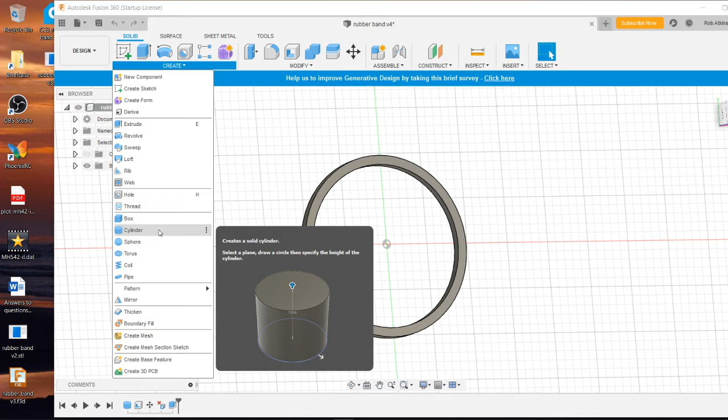Okay, guys, Fusion 360 then. It's fairly straightforward to create rubber bands. Essentially, you start with a sketch, and then you start by creating a cylinder. And from the cylinder, you can set the height after you've done the cylinder.

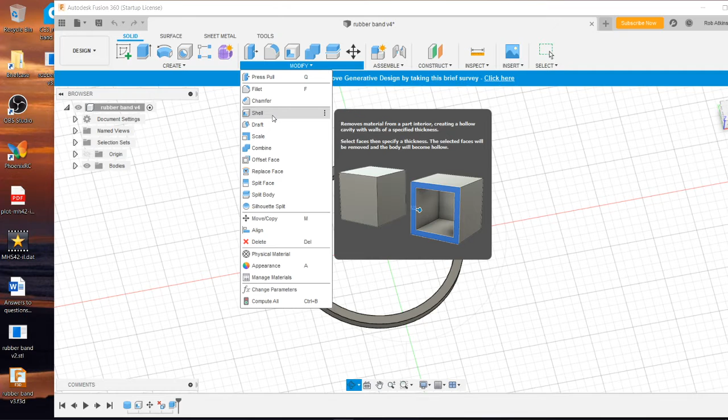Free orbit down the bottom here. You can rock this around so you can then look at the thickness of it. So you create yourself a cylinder. After you've created the cylinder, you go and modify it to turn it into a shell. And then once you've modified it into a shell, you can delete the middle section that sits in here. Otherwise, you'll end up with a sort of bottom in here.

And you can see that here, look. So cylinder, you end up with that flat bit at the bottom. You delete it out. You set your thickness. I've set my thickness, I think it's 20 millimeters across and 0.5 millimeters, but you can experiment with whatever thickness suits you best. I'm finding that providing your printer is printing out TPU okay, it will print pretty good at about 0.5 millimeter.

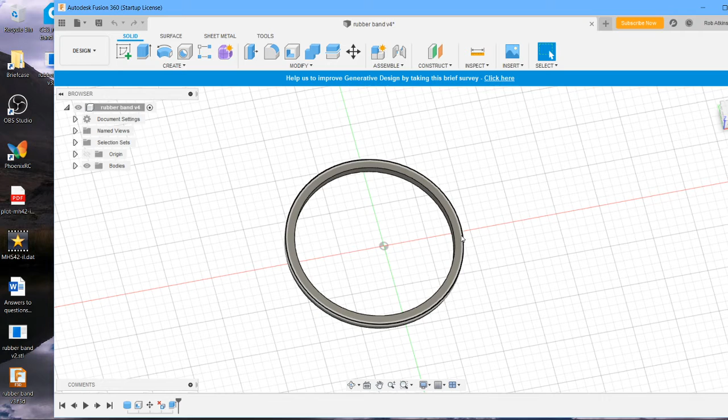When you print it, it doesn't look like it's strong enough, but as soon as you let it cool down and you stretch it over the Sycamore and lock it into the two slots, it holds either the 2025 or 2032 3-volt battery in there really nicely. Difference between 2025 is 2.5 millimeters and the 2032 is 3 or 3.2 millimeters, the battery is a bit thicker, and it works with any LED.

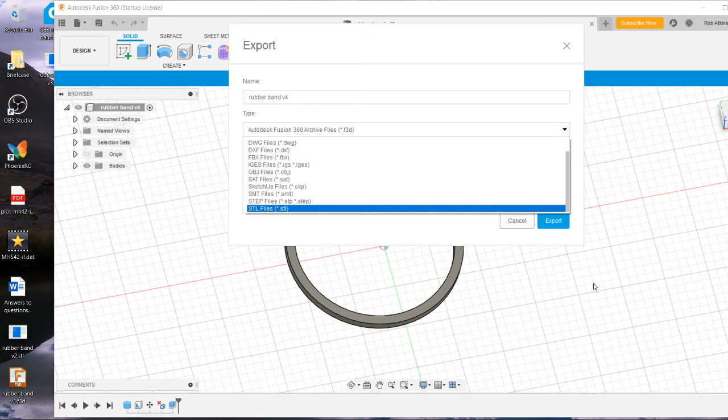Once you've done that, then you would go into Fusion 360 and save it as a project or whatever, and then you export it. Choose export, and then choose to export it as an STL file, and then it will go online to complete that task and compute it, and then pull it back as an STL file, and typically it's going to save it to your desktop. Once you have done that, so I'll drag in V3, all right.

Once you've done that, I would recommend setting your head temperature to 205, although you can experiment depending on what version of TPU you've got. Your build plate temperature can be anywhere between 50 and 60, your flow rate 102, your print speed, keep it slow basically, 45 to 50 millimeters per second. Doesn't need any build plate rafts or brims because it's fairly thick anyway, and if your build plate's good enough, you shouldn't need a brim on here.

And with TPU, as you know, it's very rubbery, and this does stick quite well on a build plate, unlike PLA, which typically requires a brim, depending on thicknesses, etc. Set your experimental settings, this is in Cura, to slicing tolerance middle. Nothing else apart from top and bottom layer of 2 and a wall thickness of 1. I think that's the key things.

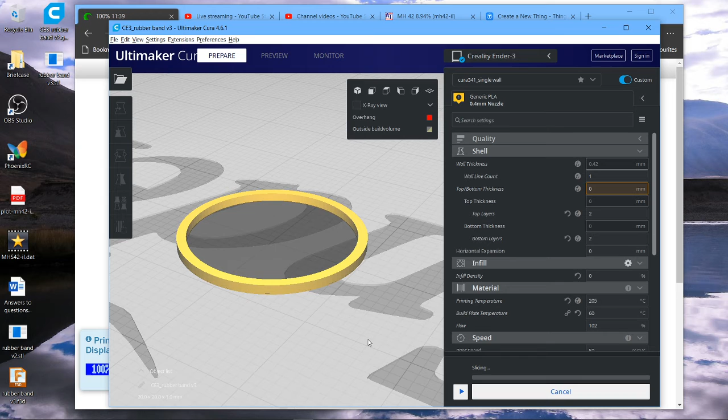And then slice it up and preview it, and let's just play this, see how it plays out. And I like this feature, I like the play feature, because you actually get to see what the printer will do. Yeah, which is what you want to see. I like to say what you see is what you get, and pretty much this is running, everything's dialed in on your temperatures and your feeds.

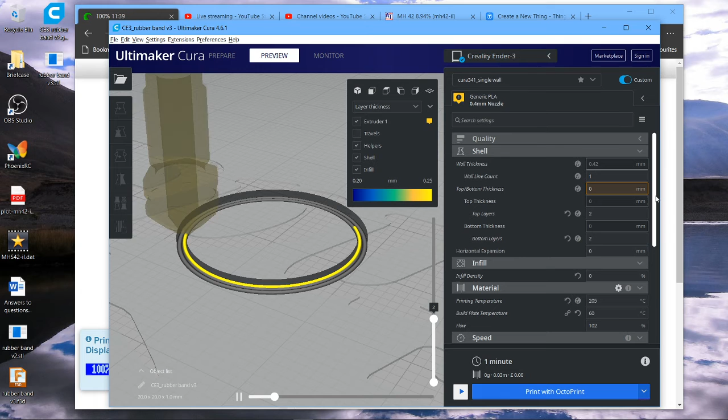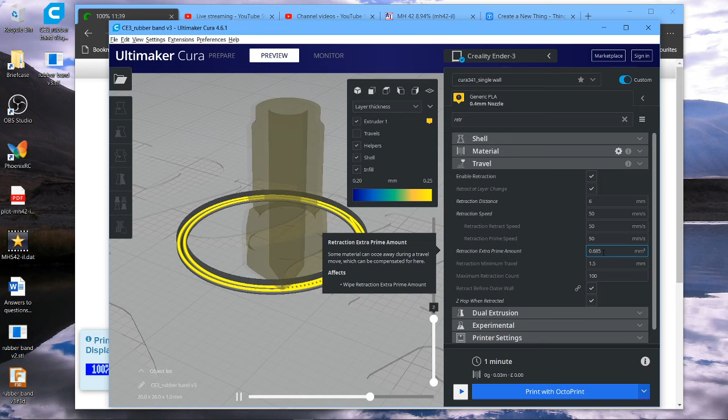Don't forget, if you're using an Ender or Anycubic or any of those other printers, you will need to set your retract settings to get good quality prints. I've found my retract settings seem to be optimal at about 6 millimeter on the retract distance, 0.685 for the extra prime, which is the amount of material you pump back into the head after you've retracted.

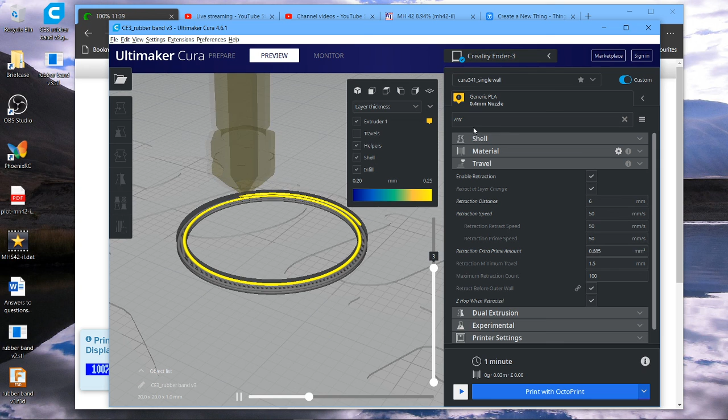And I think these are defaults, 50 millimeters per second, but the key one is enable retraction, 6 millimeters. Seems quite a lot, but it is about right for typically the Anycubics or the Enders. Any extra prime just helps put material back into the head after it's retracted. So apart from that, there's other profiles you can use on the internet. It should print out okay.